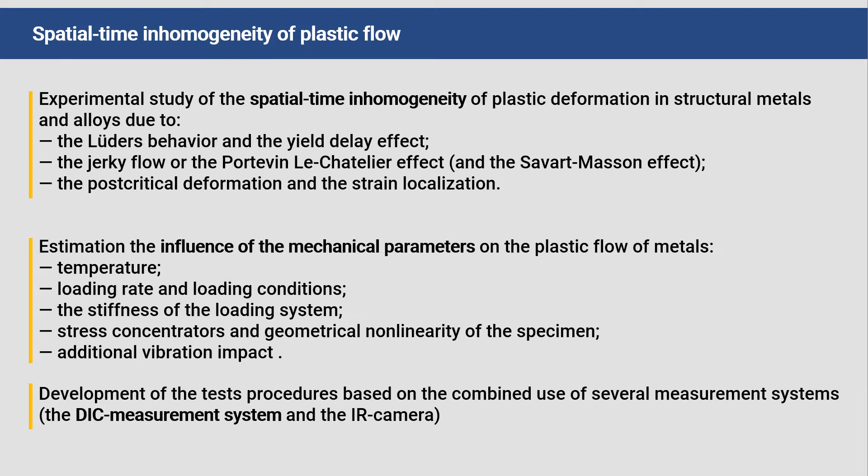So this work is aimed at the experimental study of the effects of intermittent deformation of aluminum-magnesium alloys and the development of multi-level models of inelastic deformation under complex loading conditions. So this work is about studying the temporal instabilities and spatial localization due to the Luders behavior and the Portevin-Le Chatelier effect. For this study, we have several stages or parts of investigation, such as

influence of stress concentrators on the Luders behavior. The next part is to study the influence of additional cyclic loading on patterns of the serrated flow. The next one is to estimate the influence of loading system stiffness on effects of spatial-time inhomogeneity due to the jerky flow and strain bands propagation. And the last one is to study the influence of non-monotonic loading regimes on the PLC effect.

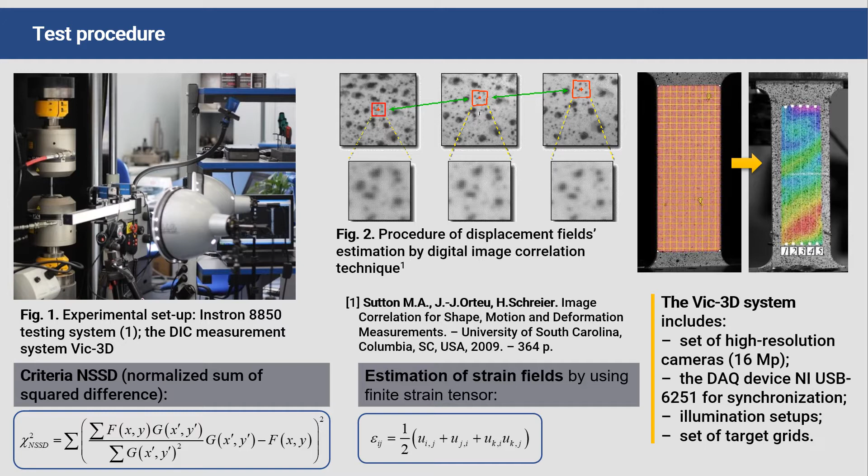Some words about test procedure. So as you can see, the loading was carried out by the biaxial servo-hydraulic testing system Instron 8850, and we provided analysis of strain and displacement fields by the DIC measurement system Vic-3D.

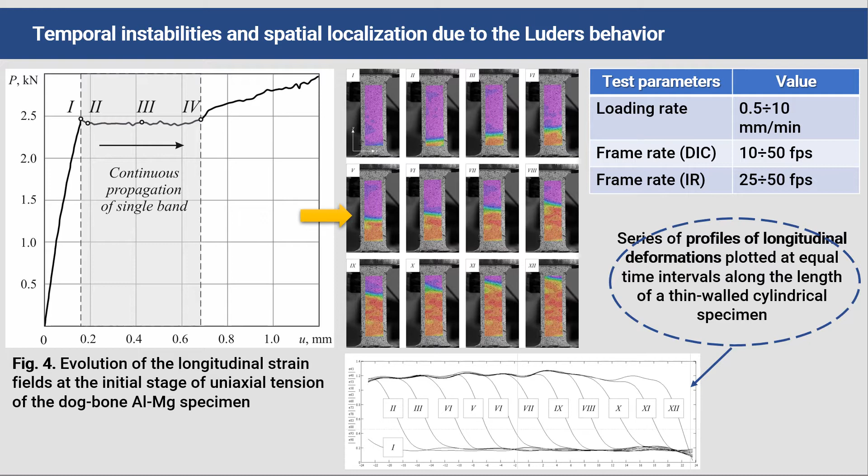At first, as I said, we studied the temporal instabilities and spatial localization due to the Luders behavior in simple conditions. We tested a flat specimen during the uniaxial tension test with different loading rates. We analyze the evolution of the longitudinal strain fields at the first stage of uniaxial tension. We can see the series of profiles of this deformation, plotted at equal time intervals along the length of a thin-walled cylindrical specimen.

During this test program, the main result was that an increase of the loading rate causes a proportional increase of the velocity of the strain bands propagation. Also, we have estimated several parameters which characterize the Luders behavior. You can see the coefficient of the inhomogeneity of the plastic flow. The next one is the velocity of the propagation of the single strain band, and several others.

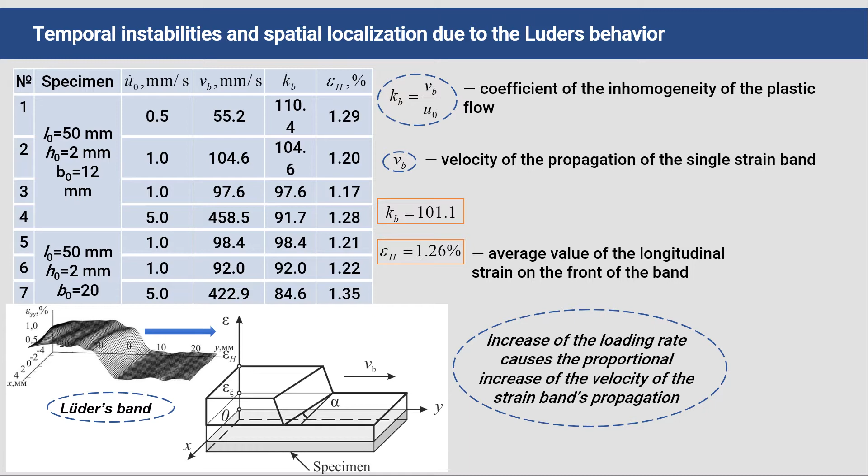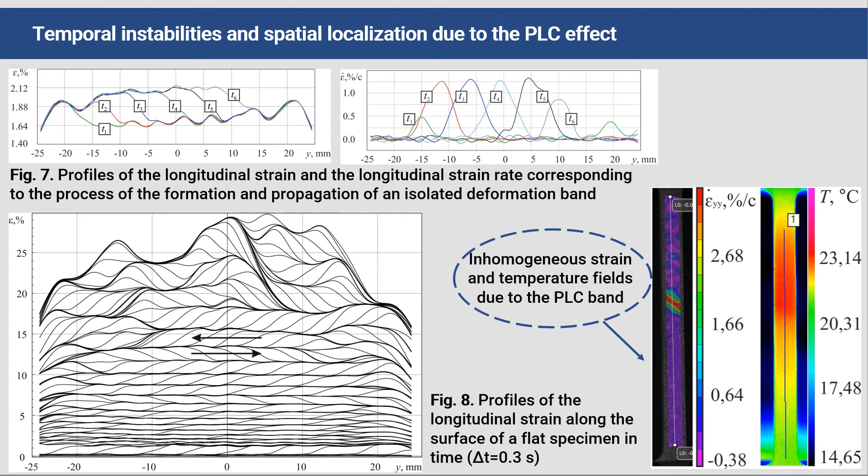Also, we studied the spatial-time inhomogeneity due to the PLC effect, and we analyzed continuous propagation of a single band due to the PLC effect, and the stochastic nucleation of bands, as you can see on the strain fields. And to analyze the process of inelastic deformation in such materials, we draw the profiles of the longitudinal strain along the surface, and you can see that there are several stages when one band started and propagated along the specimen, and we can see this on the temperature fields as well.

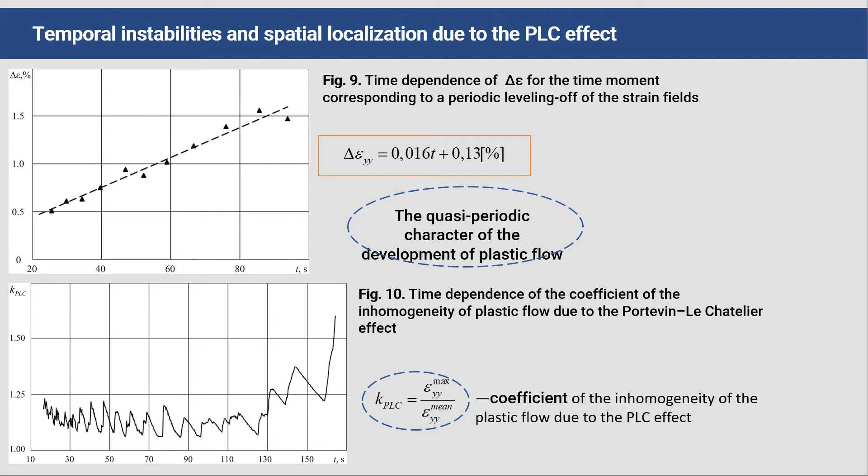So we can see the quasi-periodic character of the development of plastic flow, and it is interesting to analyze this behavior in different loading conditions. So in the next part of this work, we studied the influence of additional cyclic loading on patterns of the serrated flow. As you can see, we had some results about additional vibration impact on kinetics of strain bands.

If we look at the loading diagrams obtained for this specimen without and with additional vibration, we see that the behavior is similar, but the nucleation of strain bands is a little bit different.

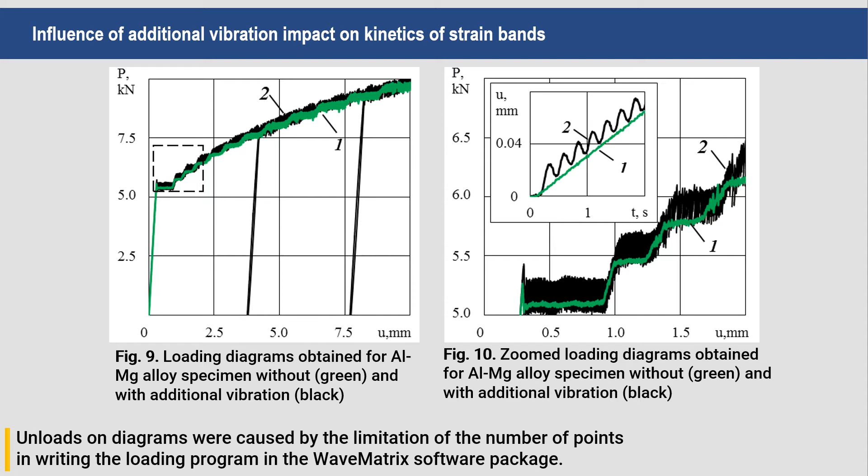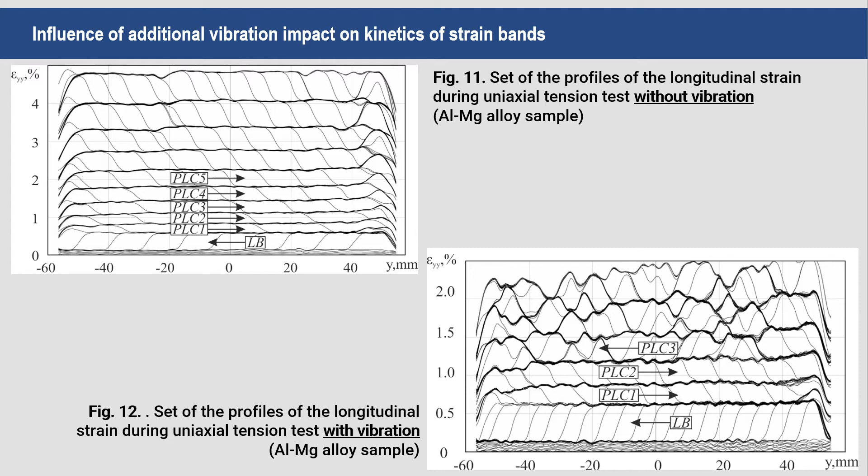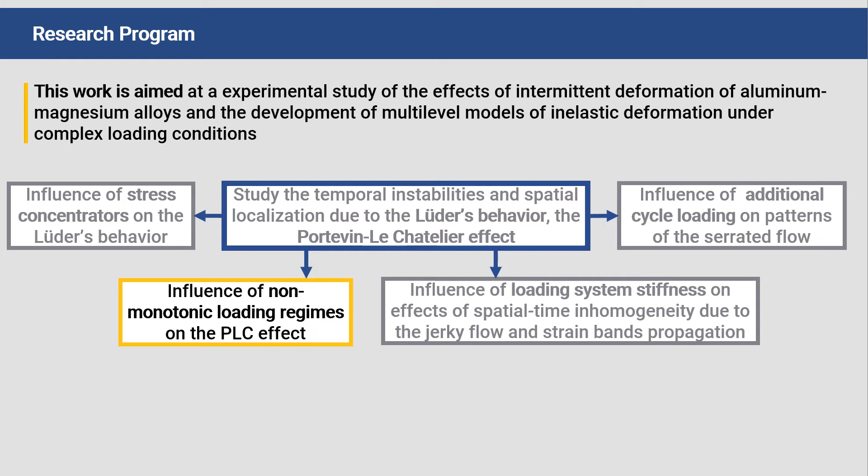Next, we studied the influence of non-monotonic loading regimes on the PLC effect. So we took the thin-walled tubular specimen for tension-torsion tests with different components. So we wanted to realize the spatial velocity of the deformation of materials.

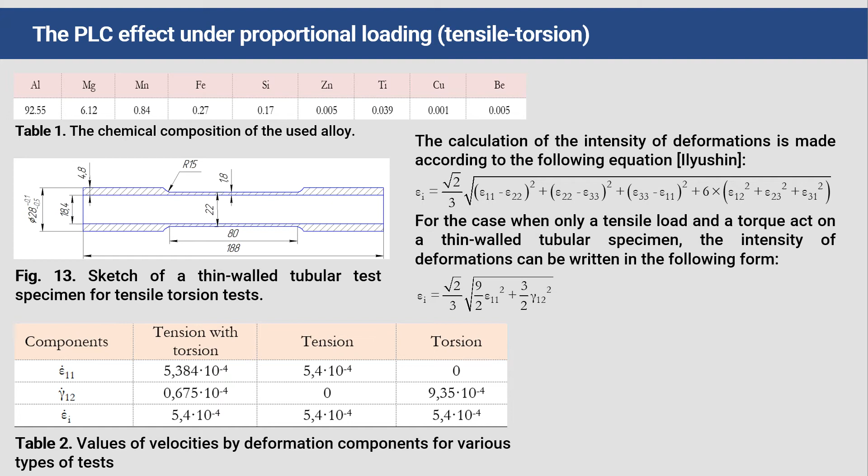So the calculation of the intensity of deformations is made according to the following equation. And for the case when only a tension load and a torque act on the thin-walled tubular specimen, the intensity of deformations can be written in the following form. So in table 2, you can see different values of velocities by deformation components for various types of tests.

So in this series of tests, we used an extensometer to control the loading rate, but due to the test methodology and its limited range of strain measurement, we need to make several stops to reinstall the extensometer.

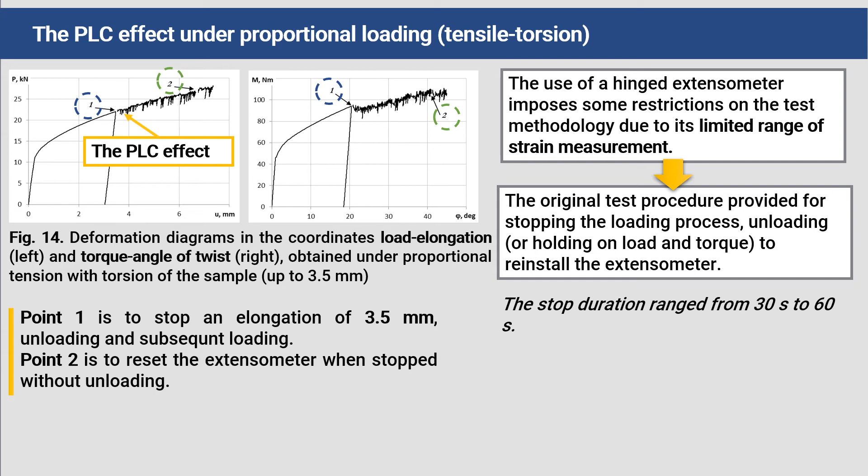So you can see on the diagram, in the first part, at point 1 there's a stop at an elongation of 3.5 millimeters with unloading and reloading, and you can see that this stop provoked the PLC effect, so we decided to perform this test without unloading and reloading.

And the next test we performed without unloading. So the stop for reinstallation of the extensometer was implemented at a lower value of the achieved elongation, but even at this level of deformations, after stopping with further proportional loading, a process of inhomogeneous intermittent deformation is provoked. So at point 2, the extensometer was also reset when the loading process was stopped without unloading.

So experimental data show that after stops, even at small values of plastic deformations, further loading leads to the occurrence of an inhomogeneous intermittent plastic deformation process. This is reflected in the recorded deformation diagrams in the form of the PLC effect.

So when we decrease the elongation level, or when we stop the loading and then continue our test, on the diagram we can see that the PLC effect starts and the level is lower than at the previous stage, sorry.

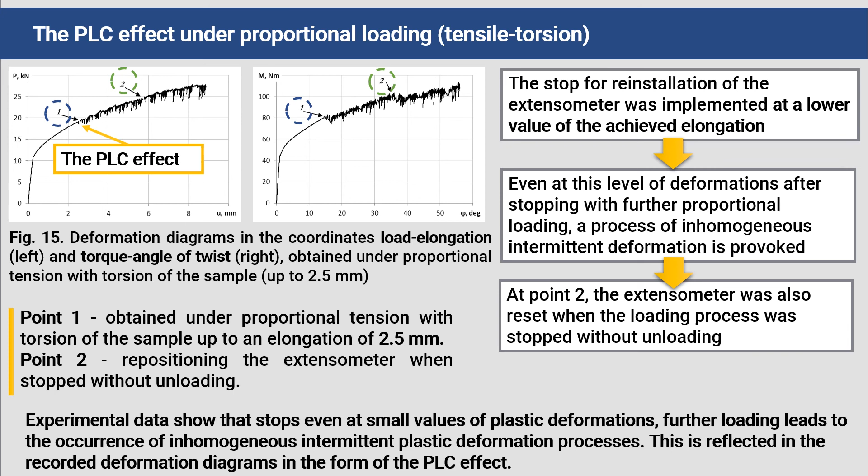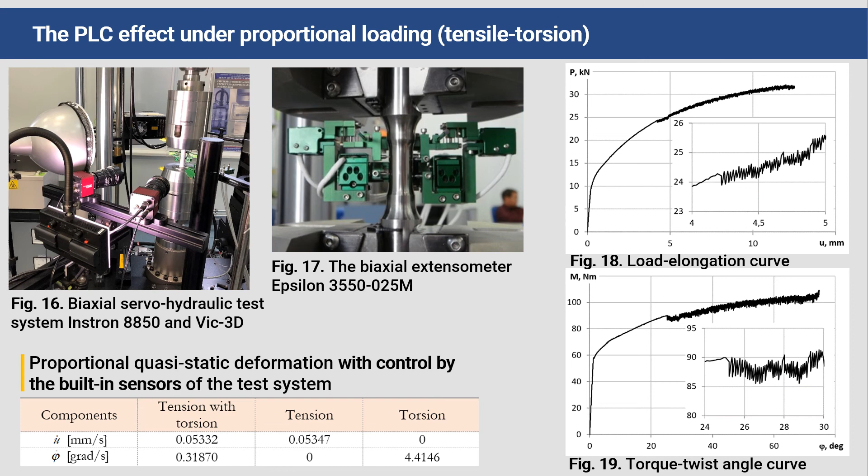Then in the last part we decided not to use the biaxial extensometer, but we calculated the velocities for the tests and controlled them by the built-in sensors of the test system. So we have these curves, and of course it is interesting to analyze the PLC effect under proportional loading.

As you can see in the series of plots of longitudinal deformations, it is interesting to see the moment when the PLC effect starts, and for example we showed the process of initiation of the first PLC band and its propagation along points 1 to 5.

It is interesting to analyze the behavior of the PLC effect not only during uniaxial tension tests, but also in tests with complicated loading conditions, and we will continue these investigations in that way.

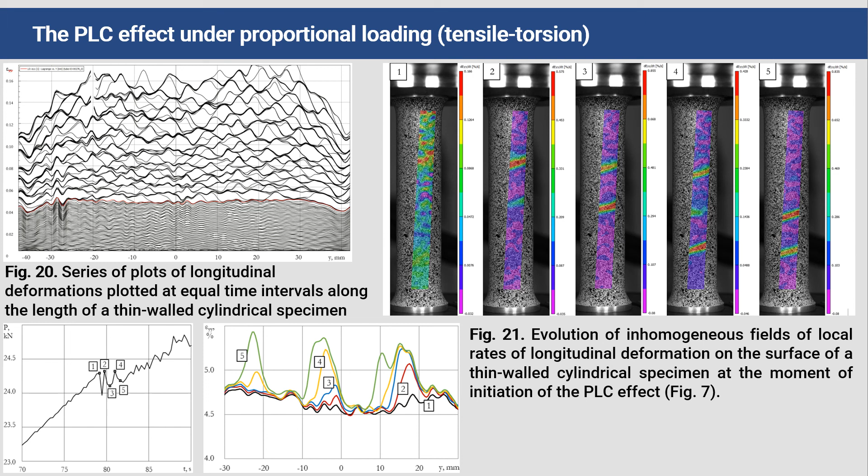So this work was carried out in the Center of Experimental Mechanics in the Perm National Research Polytechnic University in Russia. So thank you for your attention, and we are open for collaboration.